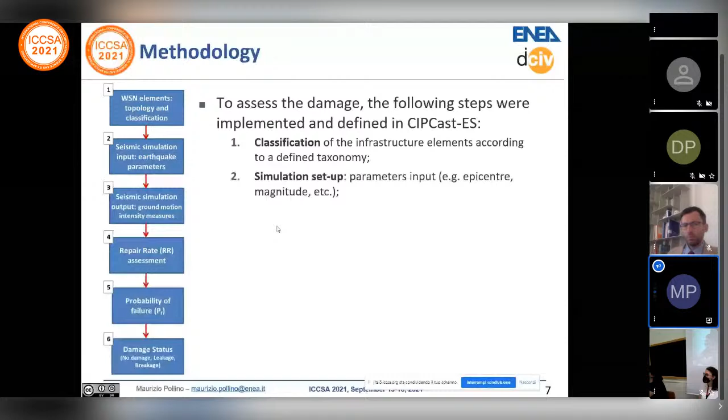Considering the methodology adopted, we first of all implemented a workflow in the CIPCast-ES application, which can be represented in the following steps.

First of all, the classification of the infrastructure elements, so that in the geodatabase of CIPCast we have the description of the characteristics of the infrastructures in terms of materials, diameter, size, and so on. Then the second step is to set up the simulation by inputting the parameters in the application.

The parameters for an earthquake are the epicenter, the magnitude, and the ground motion prediction equation, which is able to describe the propagation of, for example, the acceleration or the velocity caused by the earthquake.

On the ground, the next step is the hazard assessment, so the ground motion intensity measures that I mentioned before were evaluated and mapped.

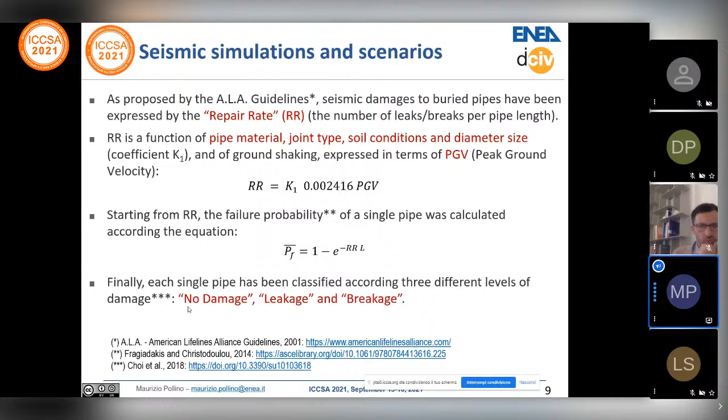Of course, we are talking about probability. It is not a deterministic approach. So we can have a probability of breakage or leakage, which is to be considered as a possible result of our simulation.

And in the next 2 slides, I will show you 2 examples of results in terms of the scenario produced at the end of the simulation.

The client is a normal browser. You can access it, of course, but access is granted only to the project partners, and it is not a public access to our application. But by using a normal browser such as Chrome, Firefox, whatever you want, you can access to the data.

You can set up the simulation, and you can run the simulation, which runs on the server side. So the computational phase is only on the server side, and it is not on the client side, so that the user can perform the simulation without exploiting any capability of his laptop, personal computer, and so on.

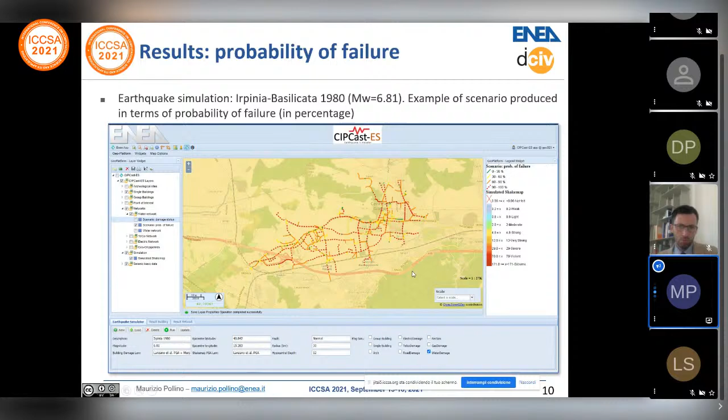And as you can see, thanks to the typical and simple WebGIS capabilities, it is possible to overlay several other GIS layers and to perform queries and so on.

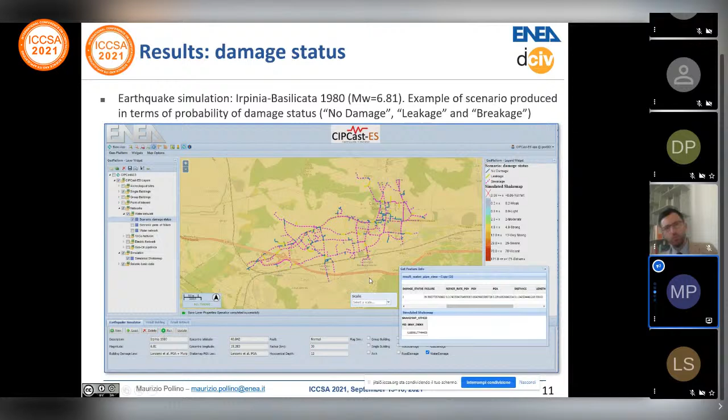Considering the conclusion, this tool, the earthquake simulator CIPCast-ES, allows to perform seismic simulation and so to perform risk analysis and to produce different damage scenarios.

One of the advantages is that you can repeat several simulations by considering different earthquakes, gathering the parameters, for example, from the parametric catalog of earthquake events produced by INGV.

But you can also create synthetic earthquakes considering the seismogenetic characteristics of the area in which your infrastructure is located.

So it is a tool able to carry out the so-called stress tests on an infrastructure. In this case, we focused on the Castel San Giorgio water distribution network, and we analyzed the impacts of 4 actual occurred earthquakes in the area.

The outputs of the simulation model that I have shown you before can represent the inputs of hydraulic simulations. So we can transfer the results via GIS format, via GIS protocols, for example, to other applications in order to simulate the hydraulic behavior of the damaged network.

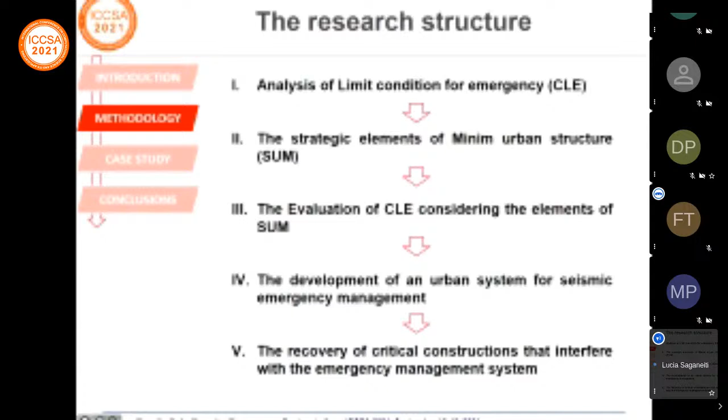The structure of the research consists of five phases: the analysis of the limit condition of the emergency, identifying the strategic elements of the minimum urban structure, the evaluation of CLE considering these elements, the development of an urban system for seismic emergency management, and finally the recovery of critical constructions that interfere with the emergency management system, because not everything can be done, but priorities must be identified.

To introduce a new methodological approach for emergency management, it's essential to implement a phase of knowledge of the housing fabric, because each inhabited area is unique and therefore reacts subjectively to adverse events such as an earthquake. Our experiment took place in a small mountain municipality in the Basilicata region, located on a promontory.

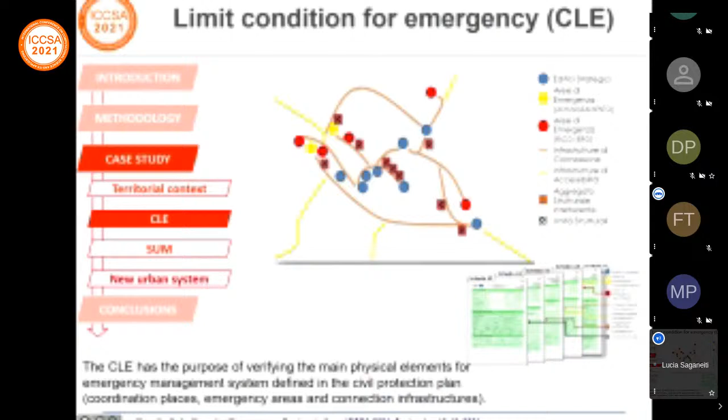The mitigation of seismic risk on an urban scale is commonly associated with the analysis of the limit condition for emergency, so-called CLE, which identifies places of coordination, emergency areas, and connecting infrastructures, along which the rescue system must be articulated following an earthquake. The CLE analysis identifies buildings shown in blue on the map, and areas in yellow and red, and the infrastructure for emergency which are linear elements. Furthermore, the aggregates that interfere with this system are reported in orange on the map.

In the municipality of Moliterno, it can be observed that the elements of the CLE are external to the fabric of the town, especially outside the historical center, and therefore the recovery of the settlement after the earthquake may be compromised.

The study on the minimum urban structure represents the modality through which the system of routes, spaces, and strategic buildings are organized in advance for the response of the settlement to the earthquake, but in order to allow a rapid resumption of ordinary urban activities after the occurrence of the event.

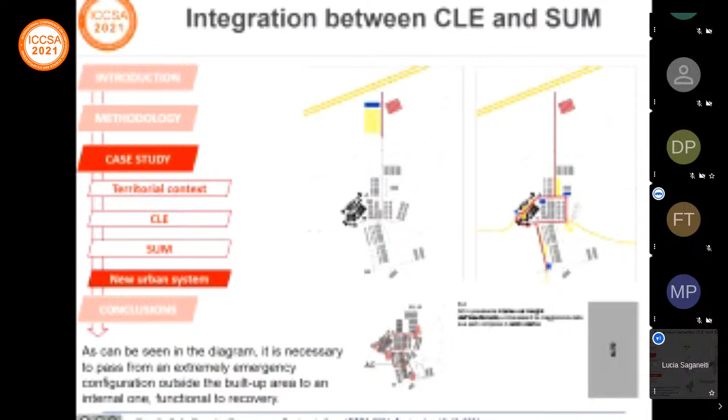The innovative contribution is related to a possible integration between CLE and SUM, considering not only the elements of the emergency phase, but also the strategic components for the resumption of the settlement after the earthquake. These strategic components are economic activities, places of relationship, and above all historical centers. As can be seen in the diagram, it's necessary to pass from an extremely emergency configuration outside the built-up area to an internal one, functional to recovery.

The ineffectiveness of the CLE for the municipality of Moliterno emerged from a specific evaluation considering the comprehensiveness criterion, the efficiency criterion, and the urban compatibility criterion, and it was noted that the strategic functions of the settlement are not considered in this system.

So the new CLE configuration given by us is reported for the municipality of Moliterno, which in this way has improved its urban response to the earthquake, because there are major strategic functions for recovery, and also we include the historic center in the system.

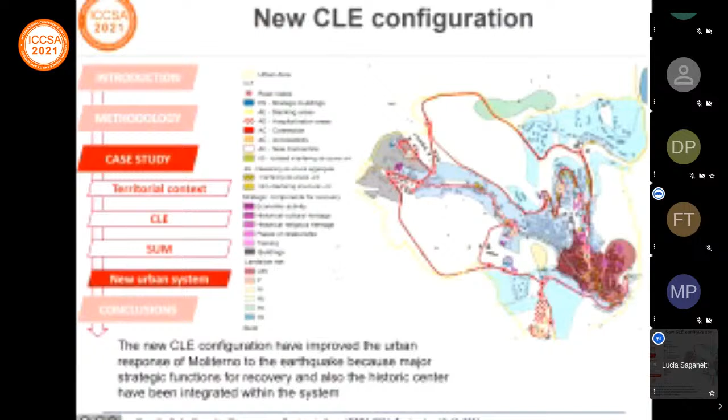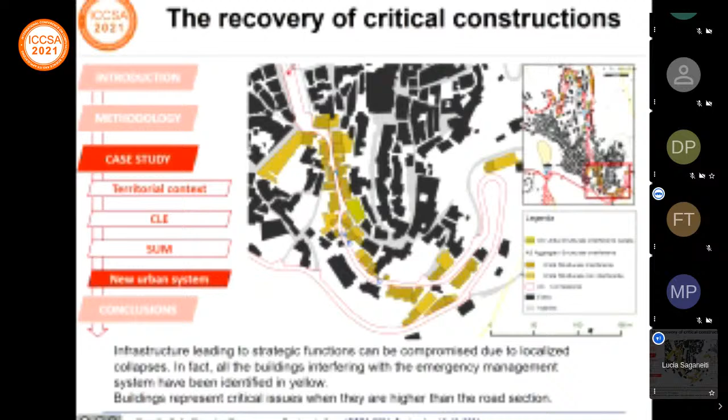A study on the interfering and critical elements was done, considering aspects such as the state of conservation of the buildings, the building consistency, the construction type, and the degree of use. For these buildings, seismic adaptation and improvement interventions must be implemented.

The recovery must not be an end in itself, but for recovery properties, the intent in the use must be linked to priority functions, such as tourist accommodation or hospitality, and widespread residence for the elderly, but also for management centers and associated services.

We conclude by saying that if we focus on minor historical centers, it's possible to identify destinations of use capable of contributing to development of the area, because they represent a heritage of cultural identity that cannot be neglected.

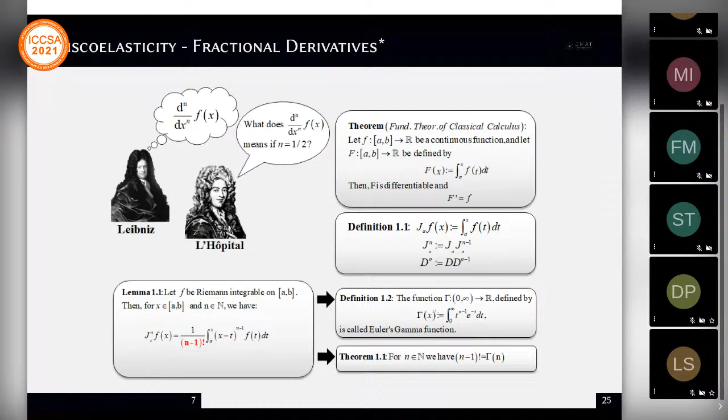So up to now we can obtain generalized integrals, but we don't have any generalized derivative. So the solution proposed in the literature is to use these integrals to create our derivatives. Since we have no restrictions on this alpha here, which may be a real value, what we do is apply the mth order derivative to this m-minus-alpha integral, and we obtain our alpha derivative, or we apply the integral to this derivative of the integrand function. These are two similar definitions of fractional derivative, but they are quite different with respect to final results.

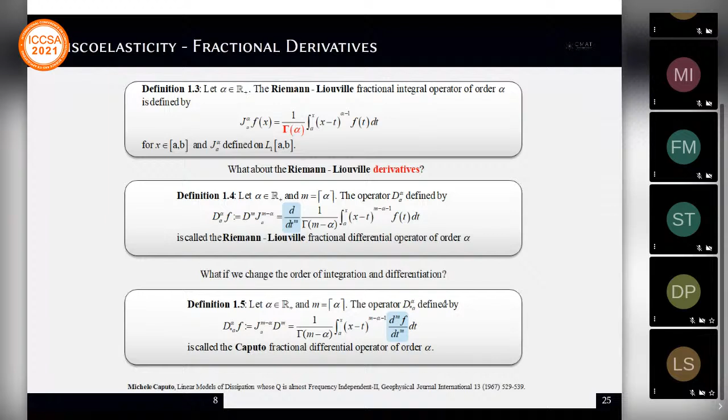So this is called the Riemann-Liouville derivative, and this one is the Caputo derivative. Basically, these fractional derivatives, they use integrals. So now, what does this have to do with viscoelasticity?

Sometimes some materials present different relaxations than the negative exponential, showing this algebraic decay. If we substitute this exponential decay with this form in our model that I showed you before for the Maxwell model, we obtain this expression. And if we compare this expression with the definition of the Caputo derivative I just showed you before, we can see that it's quite similar, basically the same.

We just have this extra constant, which is a constant related to the model, and here we have the derivative. So we can generalize these classical models to these fractional derivatives by just using this kind of kernels. Here you can see the model in a compact form, and this represents the Caputo derivative.

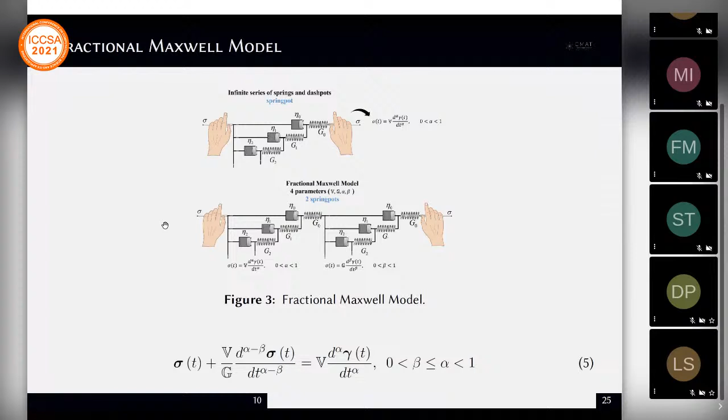A possible mechanical representation of this fractional derivative is given here, where we have this ladder structure with different parameters. Since we have so many parameters embedded in the model, we're expecting to obtain better results. This figure is just to show a possible combination of these models.

In this work, we are interested in a more complex model, which is what I'm going to tell now. Here I have the fractional derivative, the classical fractional derivative that I showed you before, and the distributed order derivative, which performs a continuous sum over the alpha parameter of the orders of the derivative, going from 0 to 1.

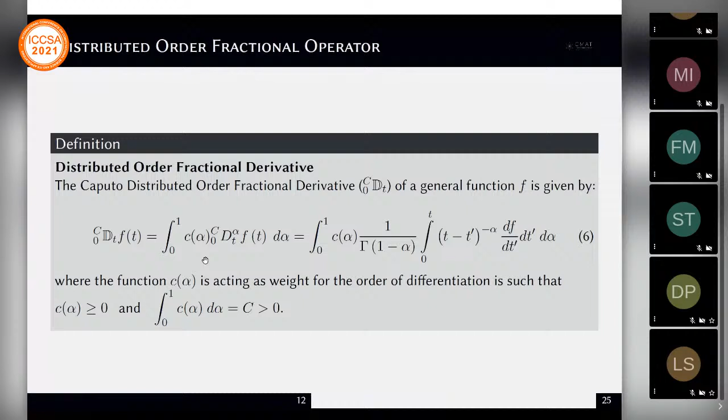So basically what I'm doing here is summing up weighted fractional derivatives, and the alpha values just go from 0 to 1. A way to derive the model based on this derivative is to assume that the kernel is given by a sum of different algebraic decays.

If we assume that this n value goes to infinity, we basically obtain this expression here. If we substitute this in our classical model that I showed you before, we obtain this distributed order derivative. This d represents the derivative that I showed you before.

Since this is a really complex model that has two integrals and derivatives, we cannot obtain an analytical solution, so we implemented a numerical method.

To better understand this method, we consider a really simple flow, which is this 1D transient Couette flow, where we have a lower wall and an upper wall, and I have a small portion of fluid between these walls. The upper wall starts to move with a certain velocity.

The equations governing this flow are these ones here. This one is for the velocity, and this one is for the stress. But you can see that they are connected because I have stress here. This is a shear stress, that's why I use xy. And I have also velocity in this equation here.

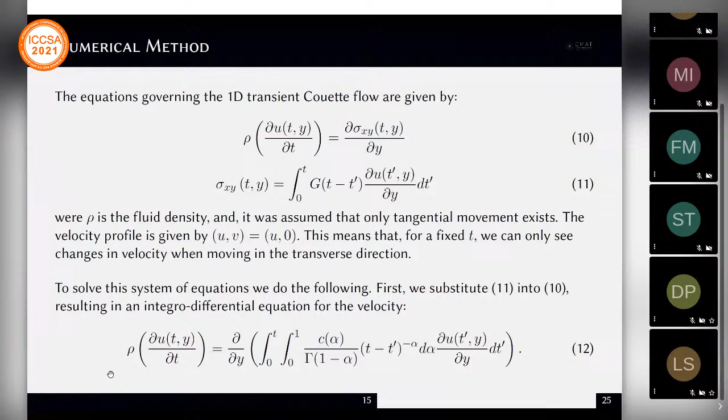Note that this kernel is given by an integral. So if I expand this equation here and substitute this in the first one, I obtain this equation for the velocity, where I have derivatives, integrals, another derivative, and evolution in time.

So this is an expanded version of the equations I showed you before. This first equation only depends on velocity, and this one depends also on velocity, but here we have the stress. So the idea to solve this problem is to first discretize this equation, obtain the velocity, substitute it in the second equation, and then obtain the results.

These are the boundary conditions. This means that the bottom wall is fixed and the top wall is moving with a certain velocity phi. These are the initial conditions, which is the velocity is 0 and the derivative, and the stress is 0, meaning that the fluid is relaxed.

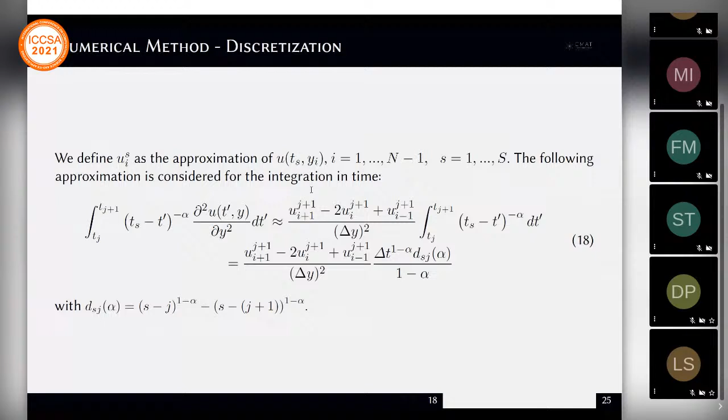So I will divide this integral that goes from 0 to a certain time into smaller integrals. Here I have no approximation, and then I will perform an approximation. I will use the midpoint rule to take this term out of the integral, and I will approximate the second order derivative with a second order finite difference approximation. This term here is obtained analytically.

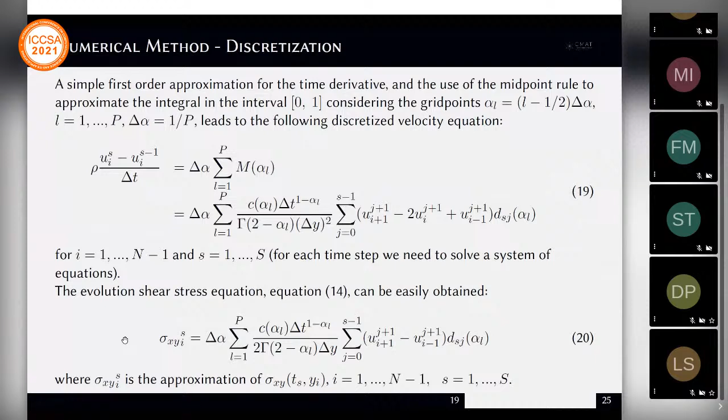I also use the midpoint rule to approximate the integral that goes from 0 to 1, and I use a finite difference approximation for the evolution in time, first order. So here is the discretized velocity equation, and after solving this equation, I obtain the velocity that I can substitute for the stress and obtain the stress profile.

So the physical process I was talking to you about before: I have an upper wall, a lower wall, and here I have a portion of fluid. I will move this wall during 50 milliseconds, and this is the velocity of the upper wall.

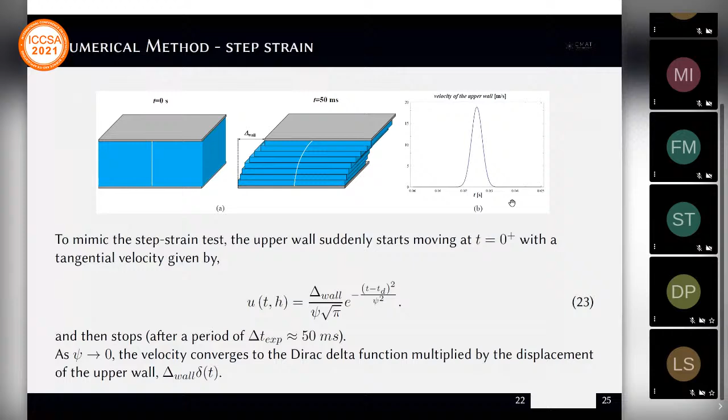It mimics a Dirac delta function. So what I want to see is that I move, I stop, and I want to see how the stress relaxes. Here are some results with different weighting functions, and you can see that exactly when I move the wall, I have a peak because the stress, or the elastic part, is reacting to this movement.

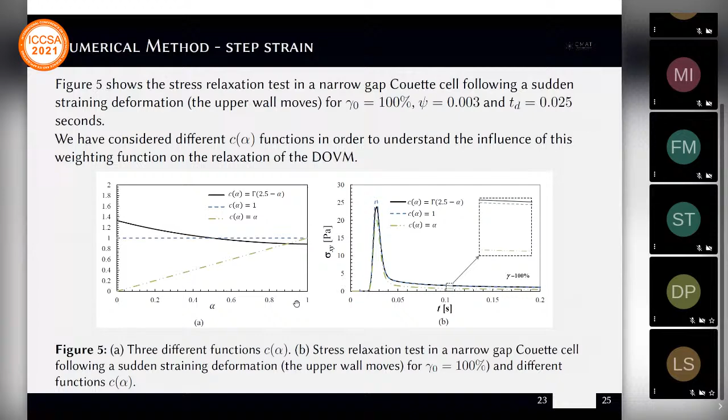Then the stress starts to relax. These different functions attribute different weights to a more liquid or more solid behavior: when alpha is 0, more solid; when alpha is 1, more liquid behavior. And you can see that the peak increases when I have a more liquid behavior.

So the conclusions: we developed a new numerical method. This method can be used to understand the distributed order viscoelastic model. But in the future we will need to perform more tests and to try to understand the model better, considering different flows. So thank you very much for your attention.

I think I took the 15 minutes. Sorry. Yes, we are out of time, but we have... Sorry, no problem, we have time for a question, a small question. Any questions? Yes, please.

Just to have an idea, because you have used during your method several numerical methods, second order numerical methods for computing the integral and the differences, the finite differences: do you have a theoretical result showing the order of convergence of your method, or is it just still numerical experiments?

Yes, for this case I only have the theoretical results for solvability. For convergence, no, I don't have theoretical results, but I have experimental results. We tested, but it was yesterday. The order of the method is not very good, it's approximately 1, and in these cases, when we have this alpha parameter, it usually depends on the alpha, so it's a quite low order of convergence. So we need to improve this in the future.

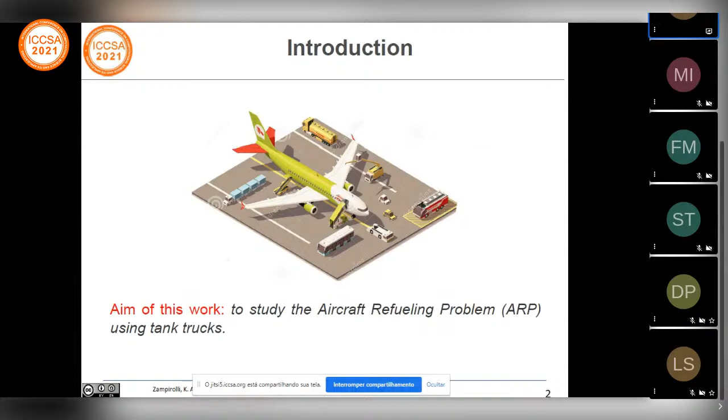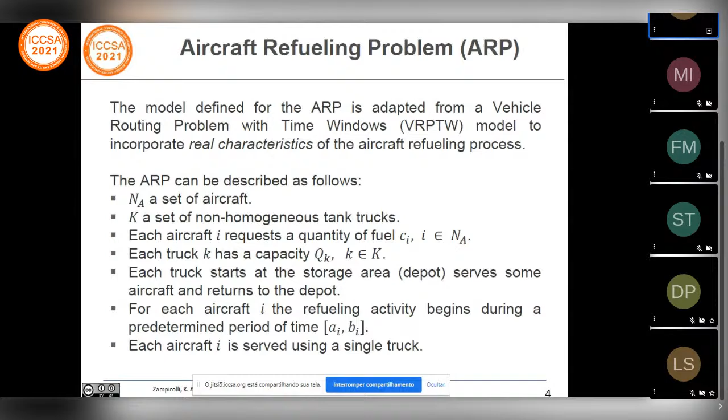In ARP, there are a set of aircraft and non-homogeneous tank trucks. Each aircraft i requests a quantity of fuel Ci, and refueling activity begins during a predetermined period of time Ai and Bi. The aircraft i is served using a single truck. Each truck has a maximum capacity, and each truck starts at the depot, serves some aircraft, and returns to the depot.

To construct the route, it is not mandatory that aircraft i is served before aircraft i plus 1. Aircraft i is located in a straight line. We consider the refueling rate of an aircraft to calculate the service time, and the average velocity of the truck to travel from one aircraft to another.

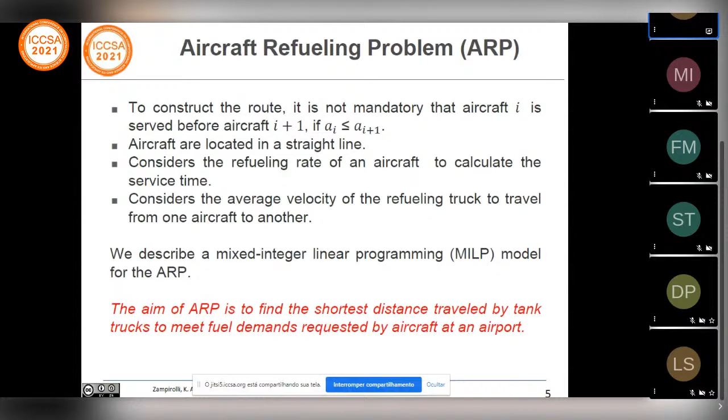We describe a mixed integer linear programming, MILP, model. The aim of ARP is to find the shortest distance traveled by tank trucks to meet fuel demands requested by aircraft at an airport. That is, we want to find the minimal cost routes, one for each truck, where each aircraft will be visited only once.

Simulated annealing (SA) and iterated local search (ILS) algorithms were implemented to solve the problem. The SA method considers an initial solution S and a maximum temperature. Iterations are performed and an initial solution is found by performing local searches in the neighborhoods of the current solution.

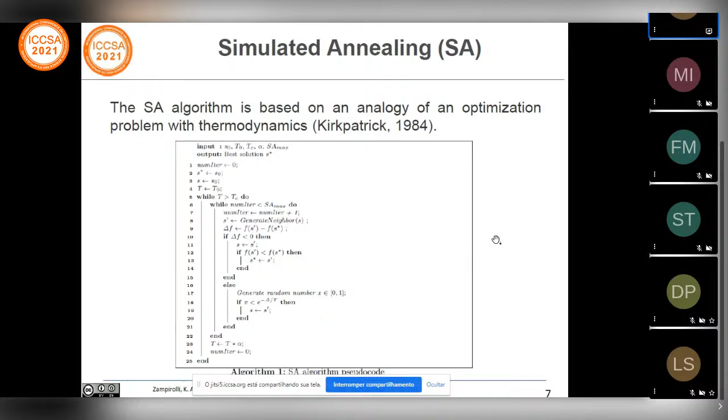The ILS consists of exploring the search space through perturbations of the best solution. It starts with an initial solution and applies a local search, then perturbs the current solution and performs a local search, reaching a local optimum.

To determine a feasible initial solution for the algorithms, two methods were defined: a random construction heuristic (RCH) and a nearest neighbor heuristic (NNH).

The local search method generates, at each iteration, solutions that are neighbors of the current solution, and accepts only solutions that are better than the current one.

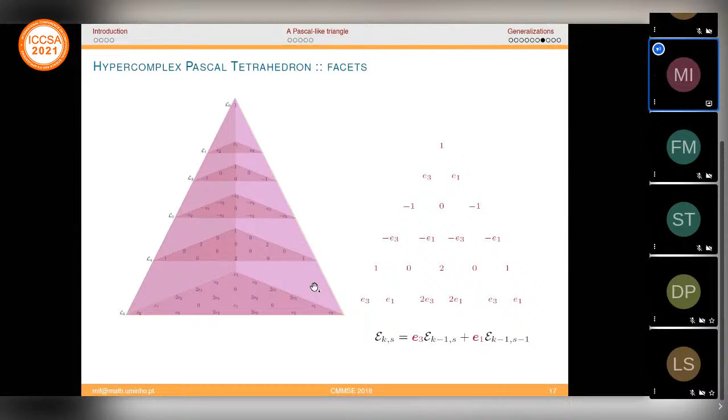So I would like to show you now, to finish my talk, a table where I have some of the properties that I have shown in the paper, not for the Pascal triangle, but for the Pascal simplex, hypercomplex Pascal simplex.

We can see here the recurrence relation. This is an explicit expression of the coefficients. Here is the row sum, the alternating row sum, and here is some nice combinatorial property that I do not have time to talk about.

But in fact, what we have observed is that during our work, we found several nice combinatorial properties, far from our research interest, but even so, we think that they are very nice.

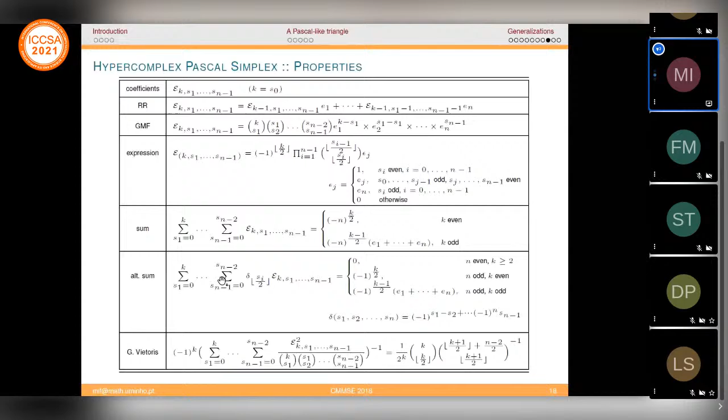So I have shown you only the results that can be easily illustrated. The paper contains other results and combinatorial relations that can be useful for development of new techniques when working, for example, with polynomials in higher dimension. Thank you very much for your attention.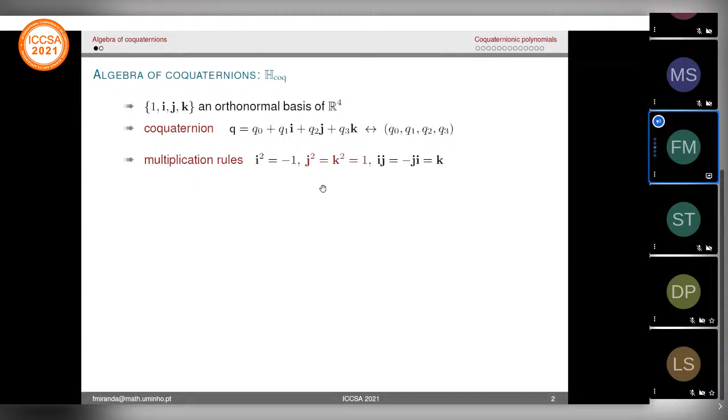I remember now the algebra of coquaternions. If we have an orthonormal basis of R4, 1, I, J, K, a coquaternion is an element in the span of the elements of this basis. The algebra of real coquaternions, which we denote by H-coq, is generated by the product given according to these multiplication rules. Observe that on quaternions, j square and k square equals -1.

In the package coquaternions, a coquaternion is an object with head coquaternion, which means it's a function with 4 arguments that are assumed to be real numbers. So we load the package, and here we can define coquaternions this way. The package teaches Mathematica to work with these objects, so plus, minus, times, non-commutative multiply, power can now operate with coquaternions.

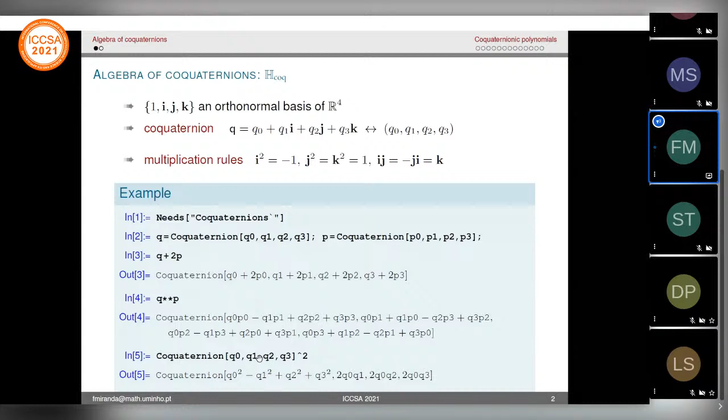Here you can add coquaternions, you can multiply non-commutatively two coquaternions, and we can calculate the square of coquaternions.

Considering a coquaternion Q, Q naught is the real part of Q, and this part is what we call the vector part of Q, represented as Q under bar. The conjugate of Q is represented by Q over bar and equals the real part minus the vector part. Trace and the determinant are these quantities. So the functions in Mathematica that compute the real part, the conjugate of complex numbers, the trace and the determinant of matrices were updated and now accept coquaternion as arguments.

So we can verify, for instance, if the conjugate of the conjugate of coquaternion P equals P, and other confirmations.

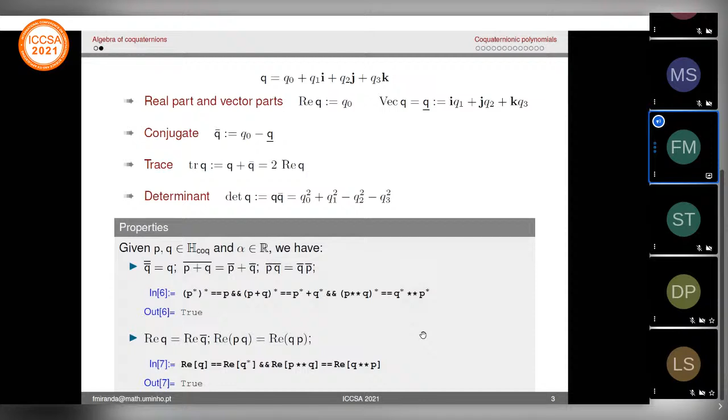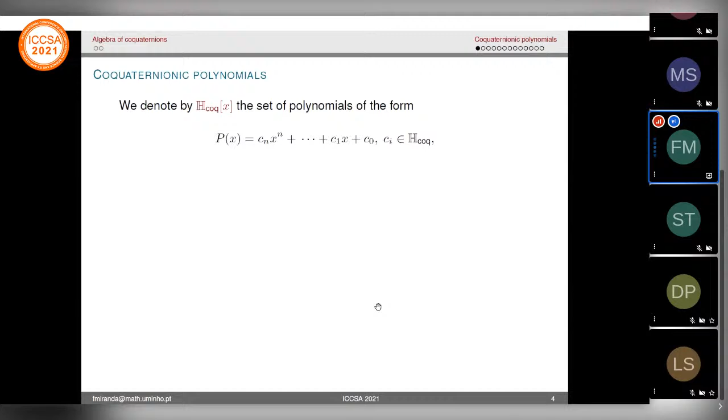The focus of this talk is coquaternion polynomials. H x denotes the ring of polynomials P of x, whose coefficients are located on the left-hand side of the variable. The addition and multiplication of such polynomials are defined as in the commutative case, which means the variable is assumed to commute with the coefficients.

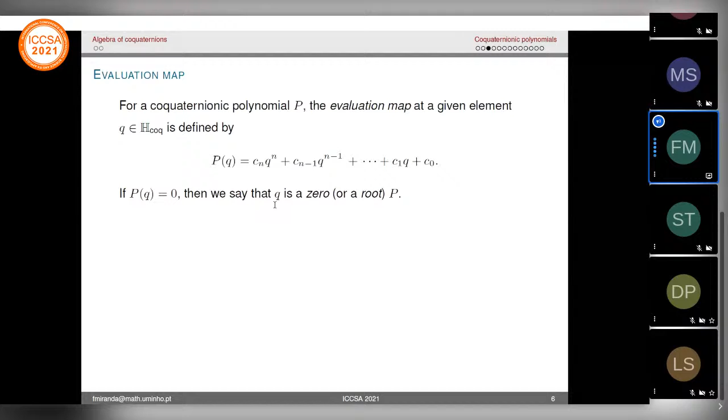We define an evaluation map that allows us to compute P of Q. Of course, if P of Q equals 0, then we say that it is a zero of the polynomial P. Here are some examples of the evaluation of the polynomials P1 and P2, with the last example evaluated at the scalar alpha, coquaternion alpha. Observe that coquaternion minus 2i minus j is a zero of the polynomial P1.

Observe that if we have a factorization of a polynomial, which means if we have a polynomial P that is the left polynomial L multiplied by a right polynomial R, in general P of Q is not equal to L of Q multiplied by R of Q. Here is an example that shows this: if we define the polynomial P as L times R and evaluate at the coquaternion Q, we observe that P of Q is different from L of Q multiplied by R of Q.

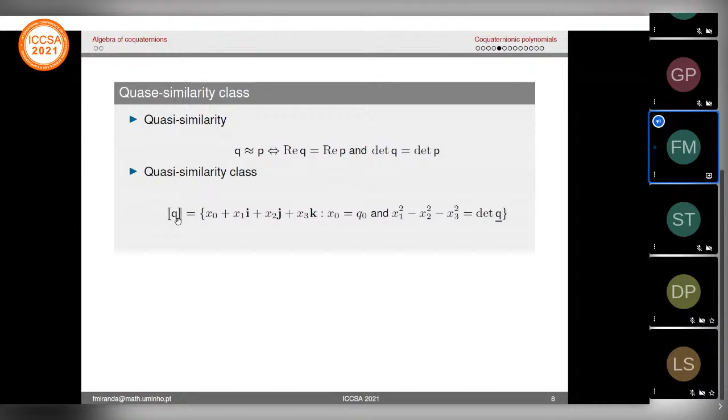We present now some definitions. Quasi-similarity is an equivalence relation: two coquaternions are quasi-similar if and only if they have the same real part and the same determinant. We define the quasi-similarity class, the class with representative coquaternion Q, this way, and we observe that this class can be identified with a hyperboloid in the hyperplane of R4, defined by the condition x naught equal q naught.

It is a hyperboloid of one sheet if the determinant of the vector part of Q is negative, a cone if it is equal to 0, and a two-sheet hyperboloid if the determinant is positive.

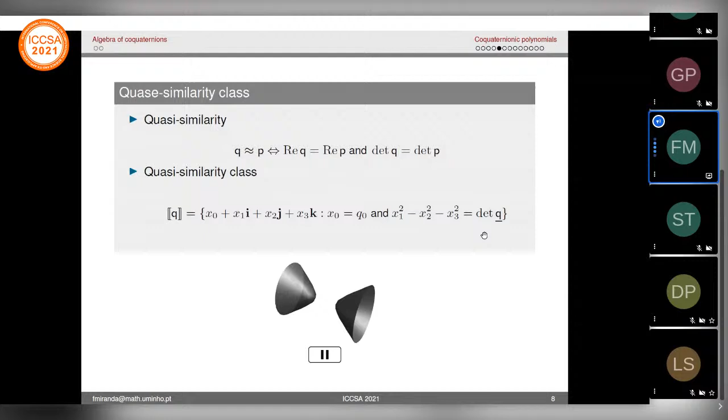The characteristic polynomial associated with the quasi-similarity class of coquaternion Q is a second-degree monic polynomial with real coefficients, defined as shown here.

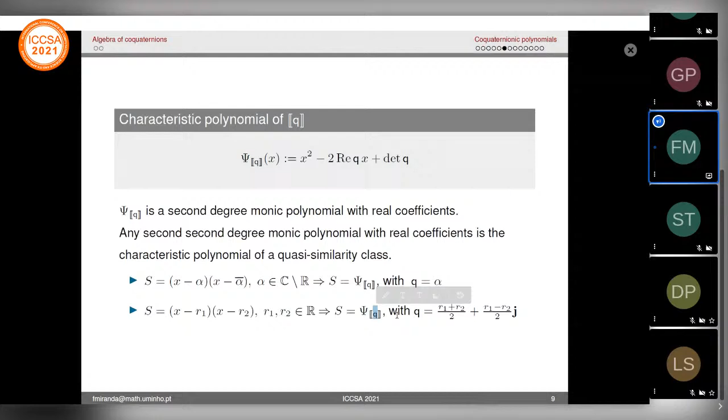Observe that any second-degree monic polynomial with real coefficients is the characteristic polynomial of a quasi-similarity class. If we have a polynomial S with this factorization, then S is the characteristic polynomial of alpha, a complex non-real root of S. If S has real roots, then S is associated with the characteristic polynomial of the quasi-similarity class of Q, where Q is this coquaternion.

We also define the conjugate of a polynomial P bar, where the coefficients are the conjugates of the coefficients of P, and the companion polynomial is P times P bar. Observe that Cp is a real polynomial, and if the leading coefficient is non-singular, then Cp is a polynomial of degree 2n.

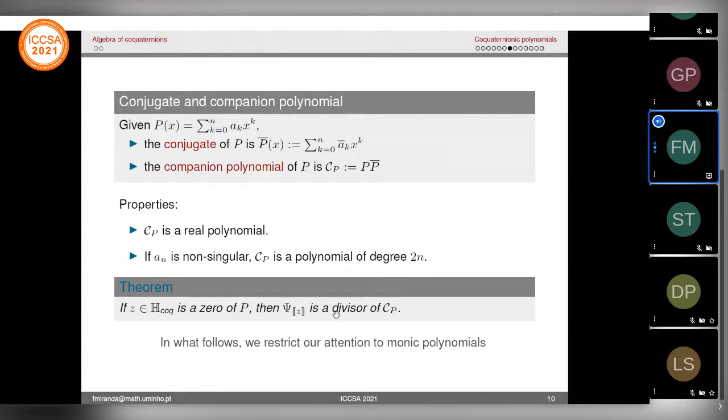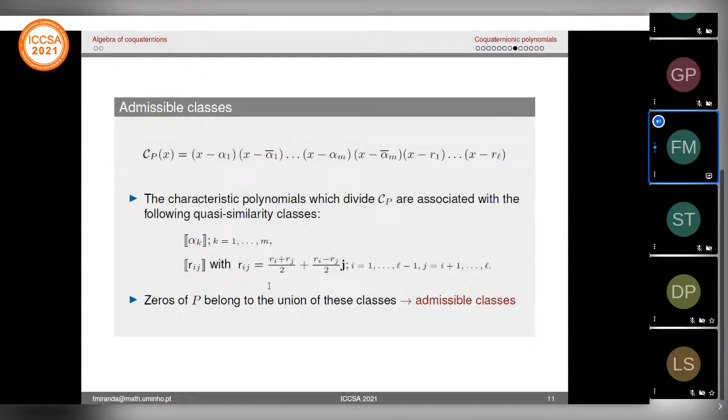Result: if Z is a zero of P, then the characteristic polynomial associated with Z is a divisor of the companion polynomial of P. In what follows, we will deal only with monic polynomials. So if we have a companion polynomial with a factorization like this, then the characteristic polynomials which divide Cp are associated with these quasi-similarity classes. Observe that the zeros of P belong to the union of these classes. So we call these classes the admissible classes for the polynomial P.

So we now present the theorem that allows us to compute and characterize the zeros of a coquaternionic polynomial. This result was obtained by us and is published in Linear and Multilinear Algebra.

Very briefly, what this theorem says is: let Q be a coquaternion whose admissible quasi-similarity class is an admissible class of the polynomial P. Let A plus Bx be the remainder of the right division of P by the characteristic polynomial associated with Q.

So we have different situations. If the determinant of B is not equal to 0, then there is a single coquaternion in this class that is a zero of P, so we call it an isolated zero. If A equals B equals 0, then all the elements of the class of Q are zeros of P, so we call it a hyperboloidal zero.

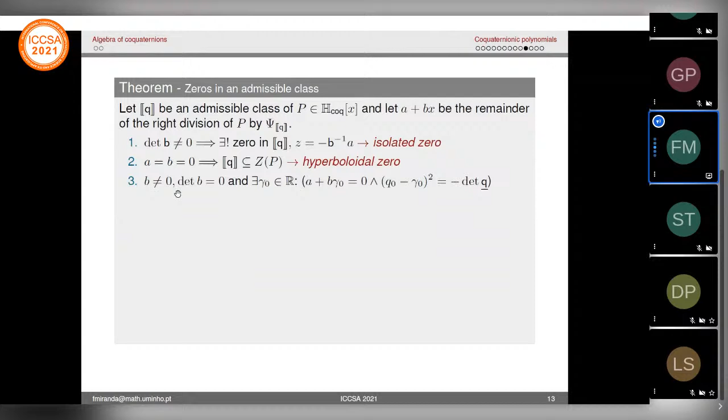If the determinant of B is different from 0 and the determinant of B equals 0, and this equation has a solution, then the zeros of P form a line defined this way, contained in the class of equivalence, so in this case we call it a linear zero. In the fourth case, we also have an isolated zero, and if none of the above situations holds, then we have no zeros.

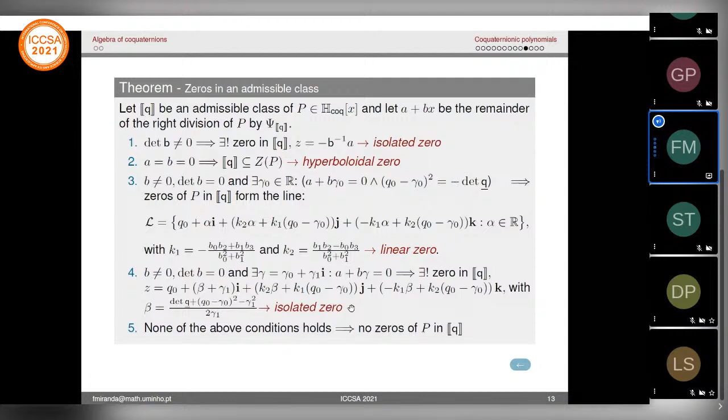I'll skip this, so I'll finish. Thank you very much for your attention.

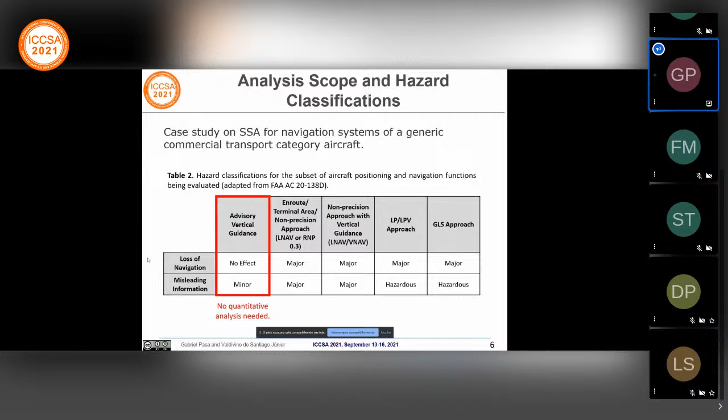So we'll focus on the 4 remaining types of operation, which include some en route and some approach operating procedures. So when the aircraft is nearing the destination, it needs to align with the runway, and the system needs to provide guidance for landing.

So the high-level system architecture for the avionics considered in this work is provided here. We have a redundant avionics bus feeding 4 display units on top, and the information provided in those display units is given by a multitude of equipment, including sensors and radio navigation sources, which are redundant.

We don't have to go into detail here, but this architecture is something that's considered in the beginning of the design of the aircraft in order to comply with the safety objectives. And each operating condition will use a subset of those equipment. So there's a minimum set of equipment that needs to be serviceable in order to perform each operation.

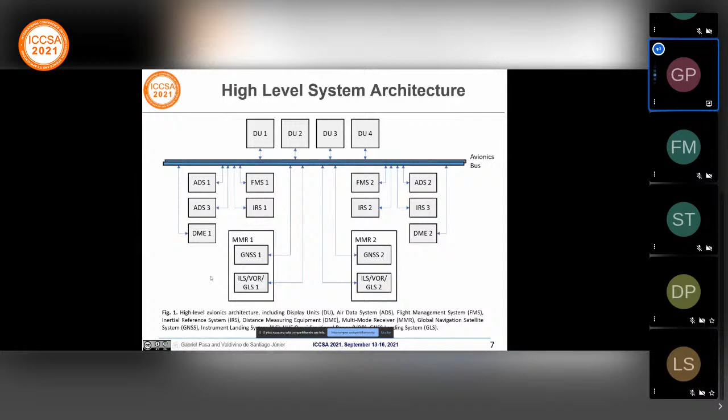So in our specific CTMC model, we're modeling failure conditions for several equipment that go on board the aircraft, and we're modeling 2 different failure modes.

It's either failed, which is an annunciated fault, or erroneous indications, which is a non-annunciated fault. At any given time, an equipment starts as healthy, operating healthily, and then it may either transition to failed or erroneous. And once it's in an erroneous state, it may eventually transition to a failed state. Typically, those failure rates are provided by the equipment manufacturer based on previous experience or internal models of the equipment.

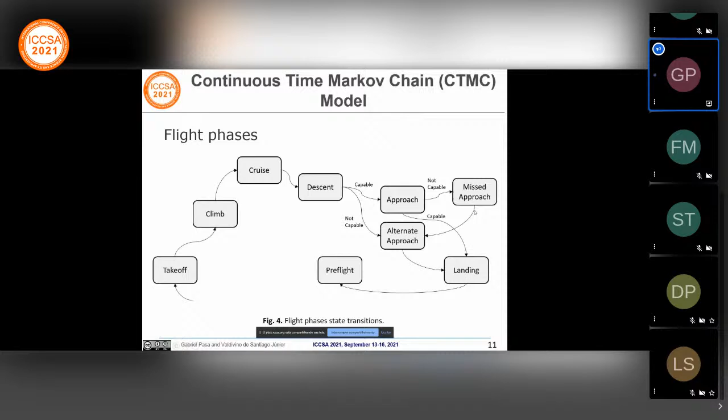So this is how Prism works. There's a software that's used for probabilistic model checking. This is how when we model that, we define each transition and define what is the probability or rate of that transition to happen based on a typical flight duration of 1.5 hours.

For specific operations such as LPV, which is localizer performance with vertical guidance, a type of GPS-based approach procedure, we define some capability formulas that define whether or not that approach is viable, whether or not there's some misleading information to the pilots during that approach.

And we define some safety properties for that specific operation based on the classifications given by FAA's AC20-138 Delta. So for a loss of navigation, it's considered a major criticality event. So it cannot happen with a probability higher than 10 to the minus 5.

And since misleading information is considered a hazardous event, it cannot happen with a probability higher than 10 to the minus 7. So when the aircraft is in a go-around state, it's assumed that there was a loss of navigation or flight phase equal 8, so it has to happen with a probability lower than 10 to the minus 5. And if it's in the approach flight phase, which is phase 5, and there's some misleading information, that would correspond to the hazardous failure condition, which cannot occur with a probability higher than 10 to the minus 7.

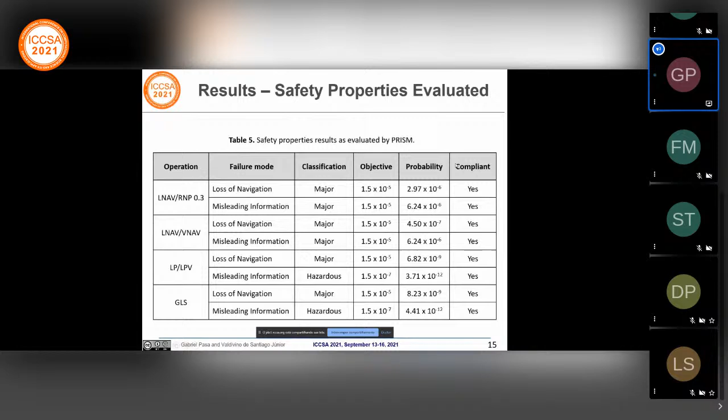So for all operation types and failure modes, we have the classification and the acceptable safety objective, which is 1.5 times the acceptable per flight hour failure rate, because we chose a 1.5 hour mean flight time. And on the next column here, we see the calculated probability for each of these events. As the calculated probability is lower than the objective, we can assert that the system is compliant. It complies with the safety objectives.

The models are relatively flexible, so they allow for easy evaluation of the impact of design parameters and assumptions, such as in this case, mean flight time. We determined that even though the first assumption is 1.5 flight hours, if we assume a flight time of 18 hours, which is currently the longest flight on record, we still comply. We may still analyze what impact that has on the probability events over time. So the models are relatively flexible and allow for these types of experiments to be performed.

So in conclusion, we can conclude that safety assessment is an inherently complex, laborious, and critical process. As such, it benefits from adoption of formal verification methods such as probabilistic model checking.

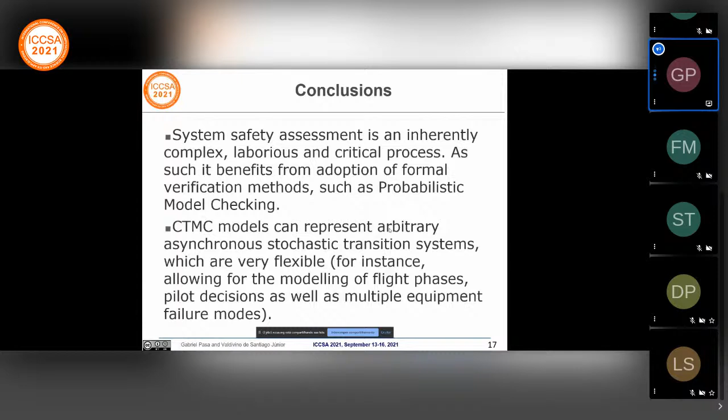CTMC models can represent arbitrary asynchronous stochastic transition systems, which are very flexible. For example, allowing modeling of flight phases, pilot decisions, as well as multiple equipment failure modes, which is good if we're modeling complex systems such as embedded aircraft systems.

For future work, one direction is trying to integrate classical methods such as fault tree analysis, FMEA, with probabilistic model checking. This can be done, for example, by using probabilistic model checking to determine the intermediate probabilities of subtrees in fault tree analysis.

This can also alleviate the issue of scalability of large models with CTMCs and probabilistic model checking as a whole, and also ease interactions with certification authorities who are invariably more familiar with classical methods, such as FTA, which is usually what's typically used in the industry.

So with this, I conclude my presentation and open to questions.

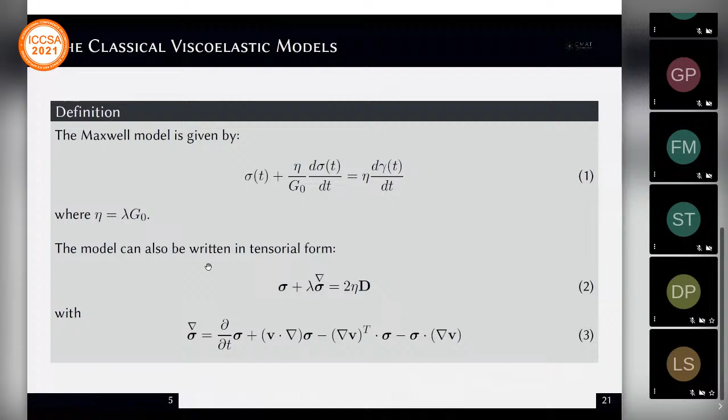So to generalize this, we use tensors, and these bold symbols represent the tensors for the stress. Here we have the deformation tensor. This lambda is related to these parameters, as you can see. This symbol here is known as the upper convected derivative. This derivative is still a time derivative, but now it has different properties that allow the model to become frame invariant, meaning different observers will obtain the same result.

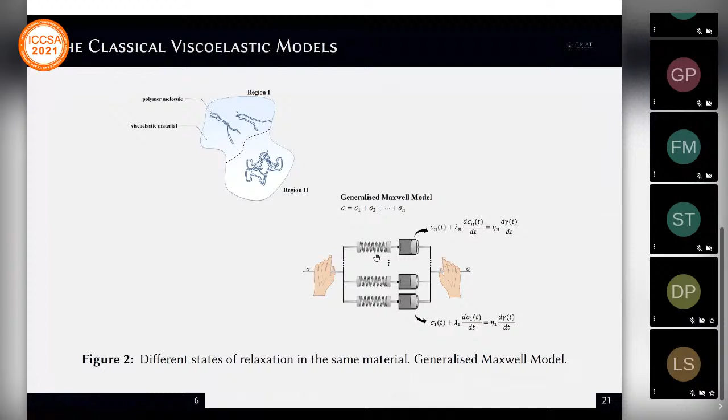These classical models were often used in the past and are still being used in the present. The model itself is not able to mimic real materials, because different materials can have different distributions of molecules that present different relaxations. So a common practice is to use a combination of different Maxwell models, attributing different parameters for each model.

More recently, a new model was developed and presented in the literature, which is quite similar to the upper convected Maxwell model I showed before. But you can tell the differences here. We only have this function here, which I'll later explain, and this derivative, which is no longer the upper convected derivative. It's something called the Gordon-Schowalter derivative, but that's not of interest for this case.

So imagine we have a time derivative here. Basically the only difference between the UCM model and this model is this new term. This new term, K, is a function of the trace of the stress tensor, represented with this sigma subscript KK, and this is related to the network destruction.

I will try to explain how this works. The upper convected model has problems because it's constructed based on a spring and a dashpot, but it cannot really represent materials physically because it allows for infinite extension of the spring, which we know isn't true. So to overcome this problem, we proposed this model with just this new function. To understand what this function does, take a look at this figure.

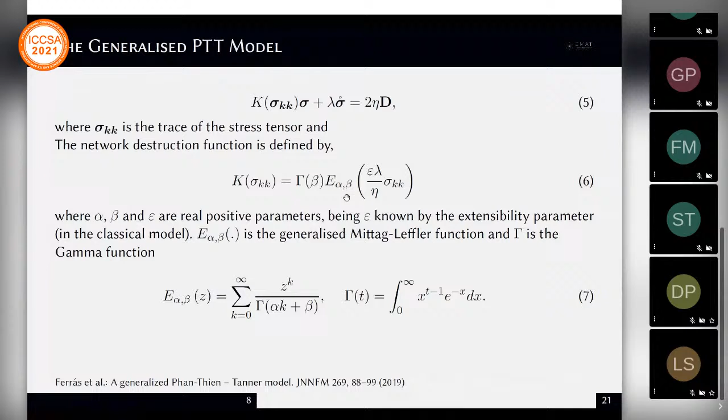So now the governing equations and shear flows. Basically what we want to do is we have a new constitutive model to model viscoelastic materials, and we want to see how the model behaves. When I say behaves, I want to see how the model adjusts to experimental data.

But for that, I need to obtain the governing equations from which I obtain that experimental data. So first, I will present the governing equations in fluid mechanics. Here we have the continuity equation, basically the mass conservation - mass doesn't disappear or get created. Here we have the momentum equation for the velocity, the law that says force equals mass times acceleration. Here we have mass, here a derivative of velocity giving acceleration, and here the forces.

The forces exerted on a portion of fluid, imagine a viscoelastic material, are the pressure and the stress - imagine shear stresses. This is coupled with the constitutive equation, the new model I presented before. So you can see all the equations are interconnected. I have an equation for the velocity, but also I can see pressure and stress here. And here I have an equation for the stress that also depends on the velocity.

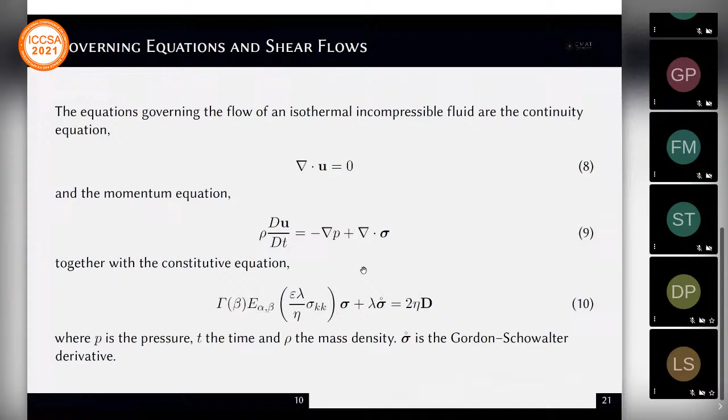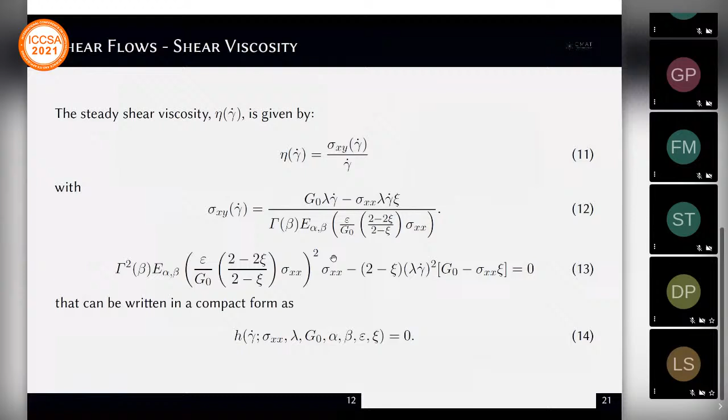This shear stress is obtained by this formula, but we have a problem here because we cannot just substitute this formula directly, because this normal stress, sigma xx, can only be obtained by solving this nonlinear equation, which we write in a compact form as the function h. We will obtain this normal stress for each of the deformations we impose.

As I showed you before, we can use more than one mode to model our material, and which is the case here. So I will assume that I have n modes, meaning I will have n constitutive equations. So the formulas I have to fit to experimental data are this one, the G prime with the hat, summing all the results obtained from the different modes - these are the formulas I showed you before. So I have G prime, G double prime, and also the formula for viscosity.

And these are the set of parameters: alpha, beta, lambda, xi, and G0, and epsilon, and also the sigma xx that I need to obtain from that nonlinear equation for each rate of deformation we impose. This means we have a quite large number of parameters that we need to optimize, and to do this by hand or by heart is quite difficult. So it's better to obtain an optimization algorithm.

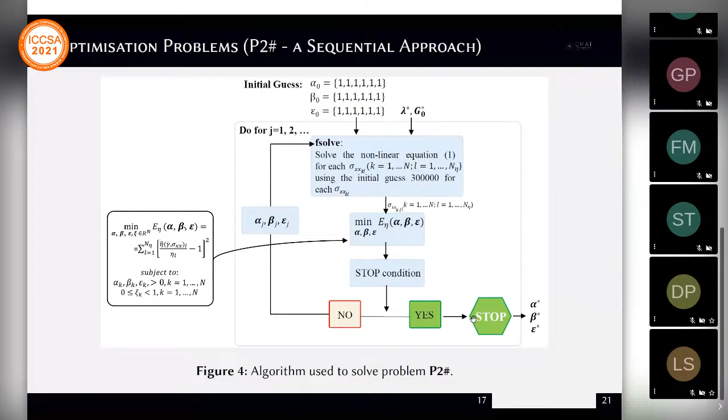So now I'm just stating that problem P1 was solved with the IPOPT method, coded in AMPL. And problem P2 was coded in MATLAB because we needed to evaluate the Mittag-Leffler function.

I'm sorry, but I have to finish. So the conclusions: we propose a 2-step optimization procedure. We could estimate the parameters and obtain a very good fit to experimental data. In the future, we would like to perform this with different experiments.

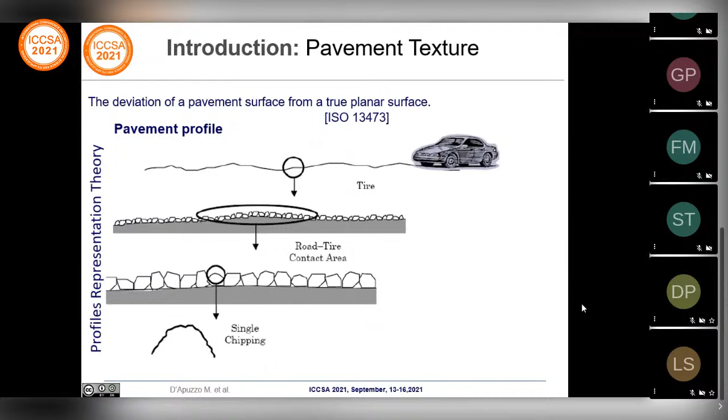Let me spend a few words introducing the concept of pavement texture. According to the International Standard Organization, road pavement texture is defined as the deviation of the pavement surface from a true planar surface.

From this definition, the pavement surface can be represented as a profile, which according to Fourier analysis can be represented by a continuous distribution of sinusoidal curves characterized by different wavelengths and amplitudes. Based on this characterization, it is possible to identify 4 different texture domains: the micro, macro, mega, and evenness domains.

Why is it so important to characterize the Macrotexture domain? Because it directly affects safety aspects such as friction in wet conditions and splash and spray phenomena, but also environmental aspects such as rolling resistance and rolling noise.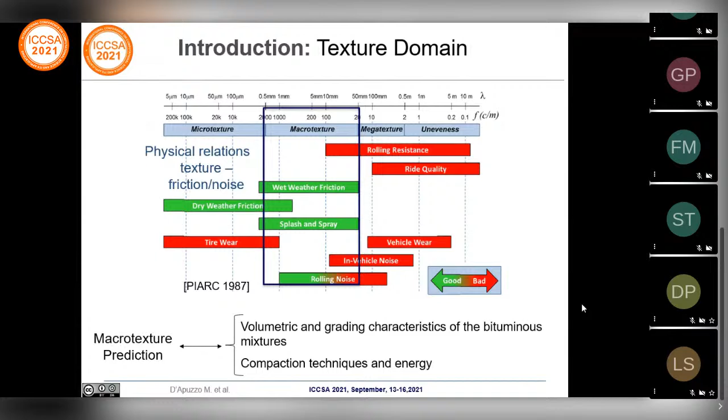From these reasons, it is important to investigate the possible theoretical links between the macrotexture prediction and the grading and volumetric characteristics of the bituminous mix, but also the compaction techniques and the energy used for the compaction. This is the main aim of this presentation.

The macrotexture can be described by means of the mean texture depth index, historically evaluated with the sand-patch method. This method was designed to provide an average depth value of the pavement by using a fixed volume of sand, spread on a circular area, and measuring the diameter of this circular area to allow evaluation of the macrotexture index.

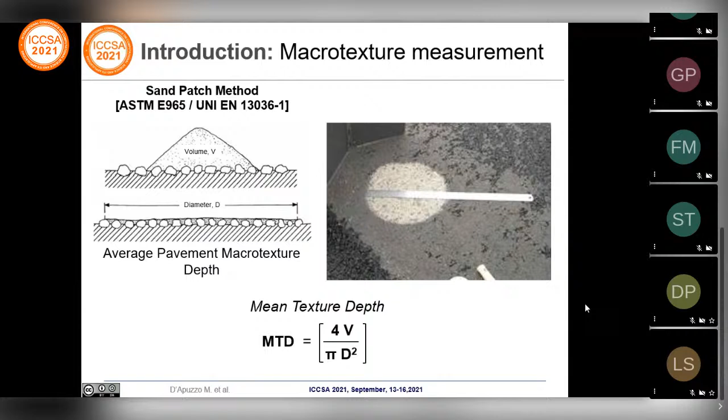As previously introduced, in order to investigate these possible theoretical links between macrotexture prediction and characteristics of bituminous mixes, a numerical model has been designed, developed, and calibrated.

There is a laboratory test which allowed us to reproduce the real compaction condition under actual road paving operation, and it is the gyratory compactor test. During this lab test, the bituminous pavement is subjected to deformation and shearing force very similar to the real action of a roller during field compaction.

According to the European standards, the test consists of applying a vertical stress on a cylindrical sample of asphaltic mixture inserted in a mold with an internal diameter of 150 millimeters. The longitudinal axis of the mold is rotated at a fixed angle of 1.25 degrees with respect to the vertical axis and performs 30 cycles per minute, applying a dynamic shear on all the sample phases.

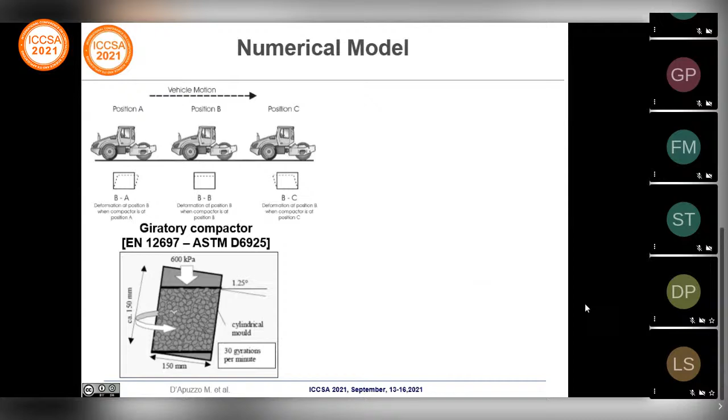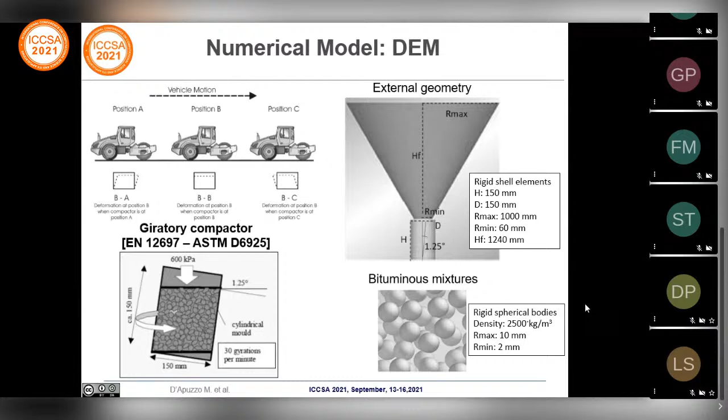In order to reproduce and simulate this laboratory test, the discrete element method has been selected. The external geometry is composed of steel mold plate and funnel in shell elements, and the aggregates have been represented by rigid bodies with spherical shapes. In particular, the rheological behavior of the asphalt mixes is described by the well-known viscoelastic model called...

The simulation is composed of 4 phases. First, the positioning of the apparatus and the particles. Then the particles are free to fall in the funnel and in the mold to have a random arrangement. Then the plates take the right position and start the final step, which is the compaction and rotation of the mold.

As previously mentioned, preliminary findings have been presented in a previous conference, so here they are just briefly summarized. First of all, after a wall effect analysis, we identify a vertical cut of 15 millimeters along the boundary of the specimen to neglect the wall effect, regardless of the particle's radius.

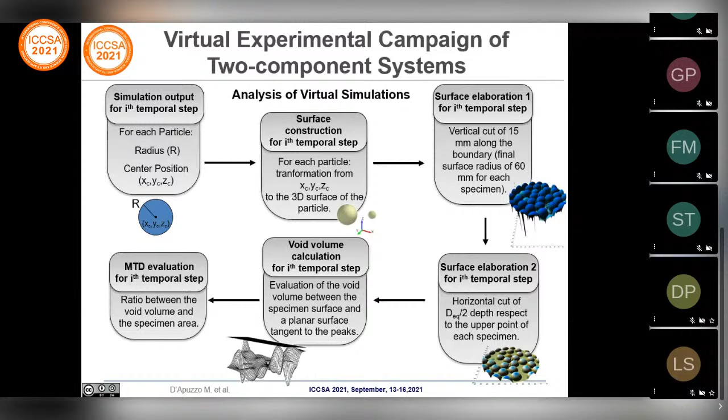Here is summarized the ad hoc code developed with the aim to evaluate, for each simulation, the final value of the macrotexture in terms of the MTD index, by means of the reconstruction of the upper surface of the virtual specimen, starting from the final position of the particles.

Here we can see the time history of 3 different mixes, and according to the physical sense and to the outcomes obtained for the monogranular mixes, the macrotexture, expressed by means of the MTD value, follows a decreasing trend during the time.

We can see that for the mixture D20-d16, regardless of the percentage proportion, the MTD value and trends are constant and similar, and this can be due to the similar value of the diameters.

Then it can be observed that generally the MTD value decreases with the smaller diameter, and in any case, between the percentage proportion at 75% of the bigger aggregates, the MTD value is almost constant and close to 5 millimeters.

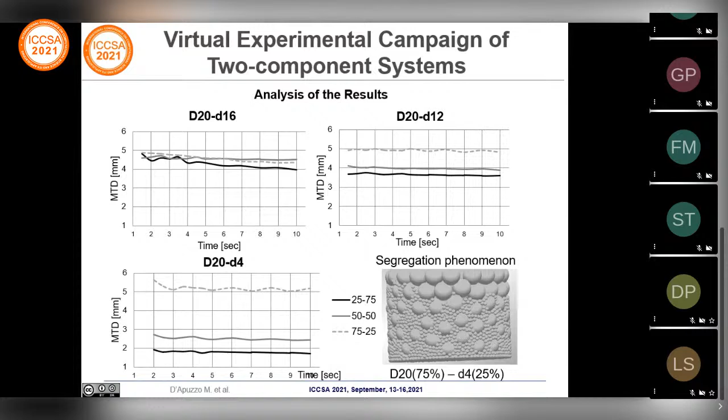In particular, this aspect can be ascribed to the segregation phenomena, which is strongly visible in the D20-d4 mixtures, where the dimension of the particle is more accentuated.

Other conclusions can be drawn, in fact, adapting the void content representation of 2-component mixes to the macrotexture representation. It can be seen that for the same percentage, MTD values decrease as the D/d ratio increases.

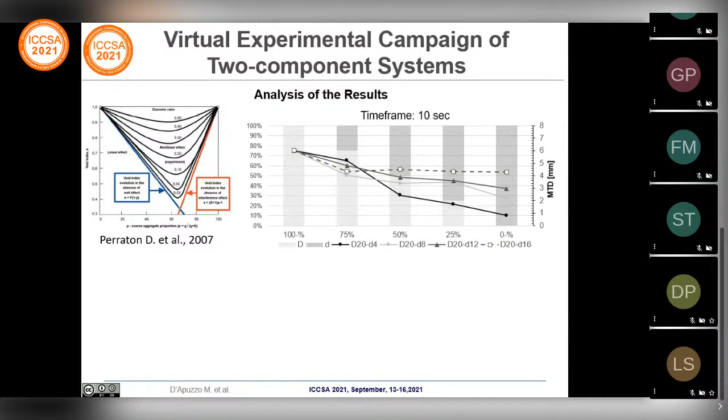In fact, a linear dependence can be found between the D/d ratio and the angular coefficient for all 4 analyzed mixtures. On the other hand, the intercept value can be considered constant.

And from these premises, the expression of the macrotexture predictive model for multi-component mixtures was designed, developed, and is here summarized.

First of all, starting from the multi-component mix, divide it into subgroups of 2-component mixes, starting from the finest. For each subgroup, apply the void content diagram representation and evaluate the MTD value corresponding to the percentage of the finest fraction, considering the subgroup as a monogranular mix characterized by an equivalent diameter.

Then these same steps have to be repeated until the final group is analyzed and the final value of the MTD is obtained. In the paper, a numerical example has been provided, and if you are interested, after the conclusion we can show an application of the method.

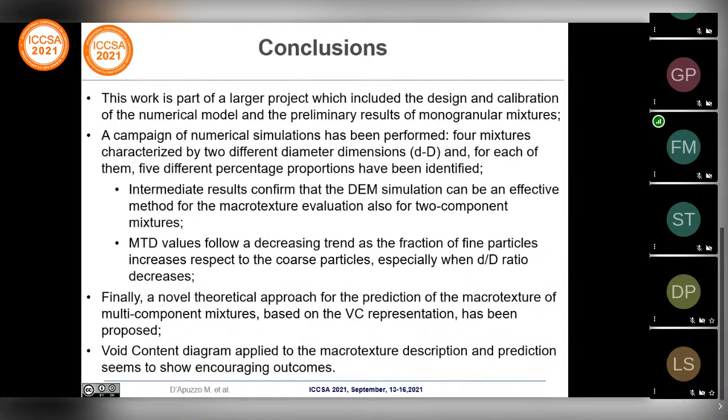Can I ask one question? Yes. Really fast question. Thank you for your presentation, a very good presentation. I just would like to ask, you were saying that you use the discrete element method to perform the simulations. My question is, do you only use the particles, or do you also model the bitumen part?

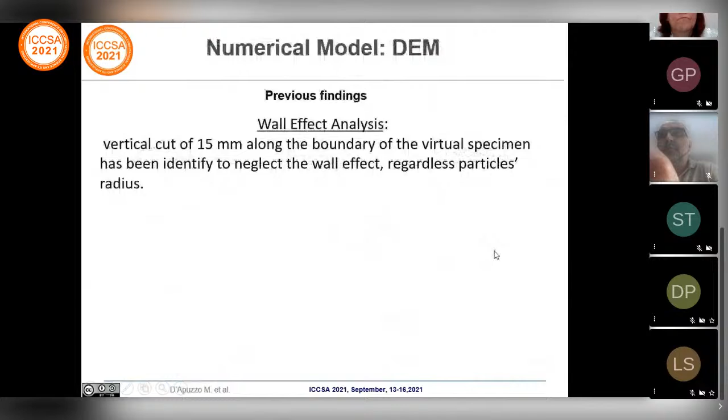Using the Burgers mechanical constitutive model, we try to model both the bitumen behavior by means of the dashpot, but also the aggregate interaction, of course.

Then, during the previous simulation regarding monogranular mixes, after the simulation, in the post-analysis of the surface, identifying the reference depth, we also take into account the presence, the physical presence of the bitumen between the particles, applying this horizontal cut.

And for example, to obtain the parameters for that model, is it possible in the laboratory to perform physical characterization of these parts? We did this - the effective calibration of the model by means of simulation of real specimens in monogranular examples. Yes, we applied this in the lab with a gyratory compactor.

Okay, thank you. Thank you. Congratulations. Thank you.